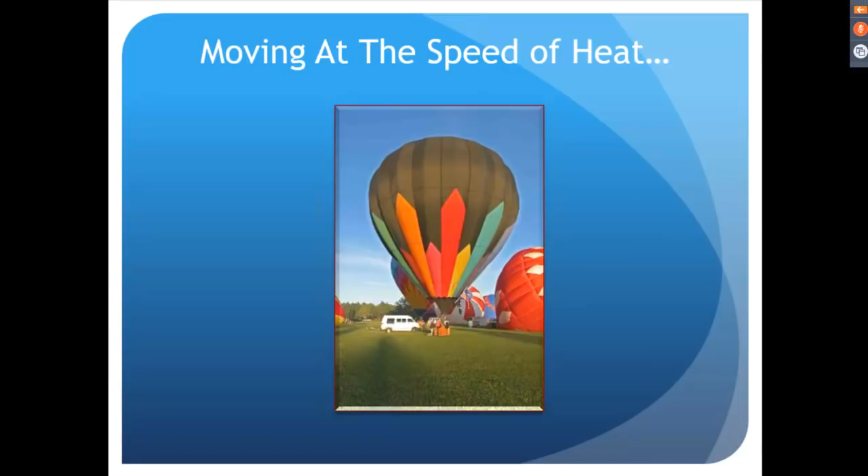To go out and fly, even just fly a balloon just for fun right now by myself would be not wise. So just because you have a rating doesn't really mean a lot to me. You can do this stuff without the ratings and be just as competent, in my opinion, as someone that has all the different ratings in order to do this.

Back when I started, if you'd have told me then that this is what I'd be flying now, that's a hard concept to get your mind wrapped around. One, because it takes so long to get there.

While you're in that tunnel, we have a joke out at the hangar where the airplane is now, that the light at the end of the tunnel, yeah, that's the freight train coming at you. So it's hard sometimes to see the light at the end of the tunnel, especially when you keep building and building and building, and you can't seem to make progress.

Sometimes you can work on the airplane for 5, 6, 7 hours, step back, and you can't see anything that you've done. It's like, what did I do? I've been here all day. So that was a constant thing throughout this entire project.

And you're going to have problems when you undertake something this complex. Just accept it. Don't get upset about them. Just figure out how to overcome the problem.

Well, back to, I wanted to build a Long-EZ. So we're back to there when this whole thing started. And I'm not very smart. I admit that, but I'm smart enough to know I'm not very smart. That makes a little bit of a difference.

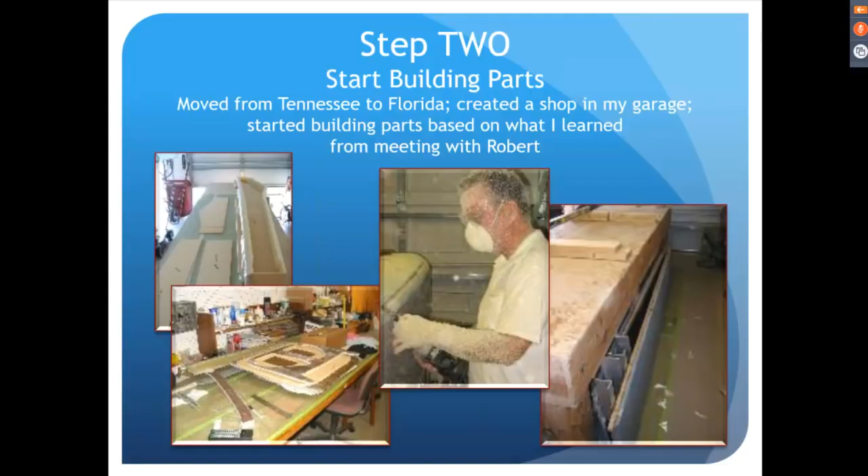Two years go by, I call Robert again. Hey, I've got these parts. I had the wings built, the canard built, center section spars built, the fuselage—in a tub stage, which means just the sides and the bottom, the bulkheads are in it.

Robert was a little bit impressed, or surprised is more the word, with how fast I was building these components, because a lot of people will talk about building the airplane or doing this and that, and they don't do it. Well, he saw that I was actually following through with it.

So he suggested making the fuselage wider for a real person. Bert's a tall guy, but he's not that big. So make it for a real person, make it wider—make it 4 inches wider, right down the middle. And then make it longer so a real person can sit in the back seat.

If you sat in the back seat of a Long-EZ, it's a little cramped. I'm only 5'9" and I'm kind of cramped in the back seat. My wife is taller than 5'9", and she would be really cramped sitting back there. So, okay, yeah—make it longer, make it 6 inches longer.

Change the front seat back so it's not as reclined—it's actually more comfortable. So we moved it 1.5 inches forward at the top compared to a stock Long-EZ. Didn't move the bottom forward, because if you do that it makes it too short and the rudder pedals get cramped. So just the top of the front seat is moved forward 1.5 inches, and then make the fuselage stronger.

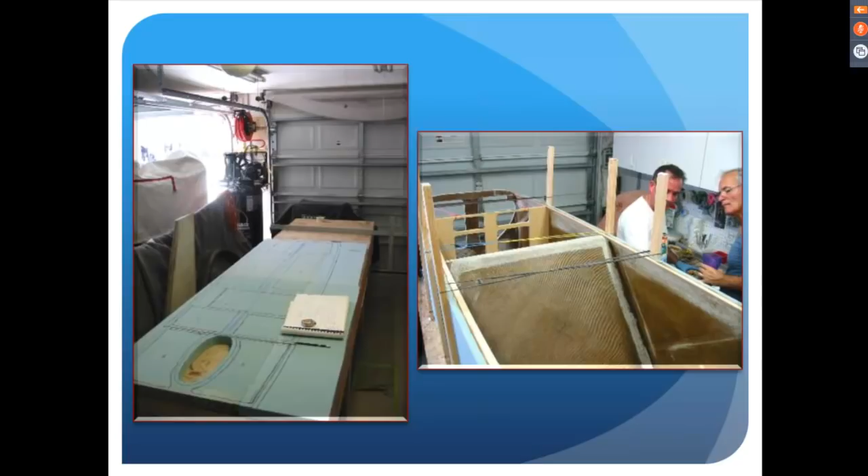This is where the fuselage is actually sitting upside down. The wood is also in a different position for the top longerons, which gives you more shoulder room. So besides the fuselage being 4 inches wider, we moved where the top longerons were to incorporate them into the sides of the foam, and that gives you another 1.5 inches at the shoulders. Makes a big difference.

Top left picture is the fuselage upside down. One of the changes we had to make because of the bigger engine and prop clearance is I wanted it to sit taller, and also a little higher, sitting on all 3 gear. You always see Long-EZs with the nose down - that's to keep the thing on the ground with nobody in it.

A stock Long-EZ only has about 3 pounds of pressure on the nose gear when it's fully extended. That's why guys always retract the nose and put it down so it won't flip over on its back. Well, we moved the gear 1 inch aft, and that changes the center of gravity when it's on the ground. Consequently, I could leave it sitting up on all 3 gear and it won't flip over.

Also, I wanted it to sit a little bit taller, so that's why the extrusions are also bigger - because I made it sit taller. The bottom right picture shows what a real tub stage is: the gear's mounted into the fuselage, wings are on it, center section's permanently mounted, and the canard's just sitting on it. That's what it looks like sitting in a driveway, and yeah, you get some strange looks from the neighbors when they drive by.

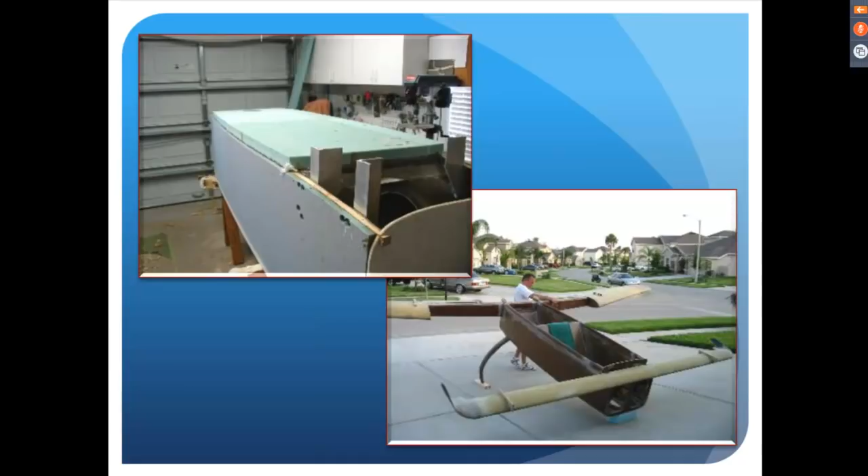Then Robert drops the big bomb. In the middle of all this, once he sees I can actually do all this building, he says, why not put a jet engine on it? I go, wait, what? So Robert had already built the Cozy Jet and flown it and proven the engine.

The engine itself is a GE T58, General Electric, originally designed back in, I think, the 60s as a pure jet engine. But the contract fell through, so GE ended up putting a PTU section on the back of it - that's the right side of the picture. The very right side is what's called a power takeoff unit, a PTU unit. That's where the transmission is, and it goes for a helicopter, for the drive shafts and that kind of stuff.

Obviously, we don't need that, so we actually take the PTU section off. Taking that PTU section off, you also have to modify the back of the engine, and I have some pictures further in that I can show you some of those modifications. So we actually take it from a gas producer back to its original intent as a pure jet engine.

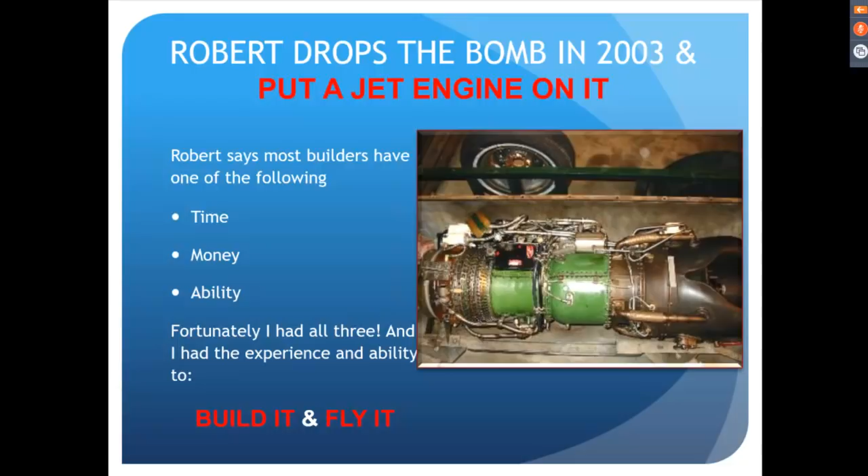It was on eBay for $12,000. I called the guy, offered him $10,000 to take it off eBay and sell it to me. He did. What you see it sitting in here is the can that it was in. You can't really tell, but in the top left of the engine there's a yellow and green tag hanging off of it. Most of the components on this engine were zero time - they had been removed and replaced by the Navy. So this is a zero time engine by the Navy. I got very fortunate getting a zero time jet engine - by the time I had shipping, I had $11,000 in the engine. Those engines now run anywhere from $38,000 to $40,000 for the same engine. I just got really, really lucky to get this engine at that price. I've not found any at that price, at that condition, anywhere close since.

Some of the changes that you make - these are just some of the changes that happen. Now, a rule in building an airplane: you change one thing, you're going to change 6 others. I'd say that's a bit conservative. The engine mount attachment points are the same place you'd find on a Long-EZ, but the attachments are a lot stronger.

It has to have an intake plenum system in order to feed the engine. Now, I'll tell you anything about this airplane you want to know - there are no secrets in building this airplane except one, and I'll tell you the reason: the intake system, the plenum system. I'll tell you about the intakes, but I won't tell you about the plenum. I'll show you pictures of it - you can see it when I pull the cowling off, did it at Oshkosh. But to explain it, there are internal sections to it that you can't see. That plenum is critical to the engine running.

It's a turbine engine, right? It's got a big fan at the front of the turbine. Air has to hit that fan at the exact correct angle in order to feed that engine. If you make the intakes too small, you're going to starve the engine - you never get the power you need. You make them too big, you can end up with tunnel rumble - the air rumbles in there, it actually builds up an air dam in front of the intakes, and it'll actually slow you down. So that is really the only secret.

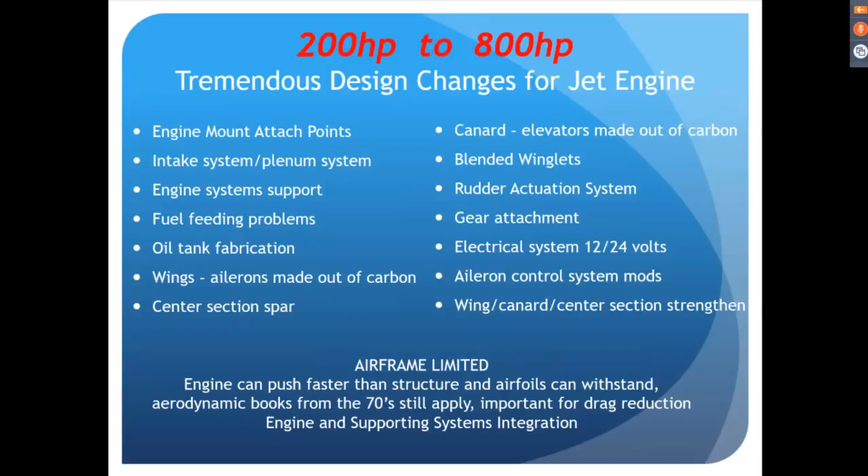So you actually have to pull the nose up, and as you get higher, your climb rate actually increases. Now that's not particular to this airplane - I fly an Airbus for a living, and the same thing happens in the Airbus. It's a dog above 25 to about 32,000. Hit 32,000, it's reached its max true airspeed, and all of a sudden the climb rate increases. That's pretty standard with this kind of airplane.

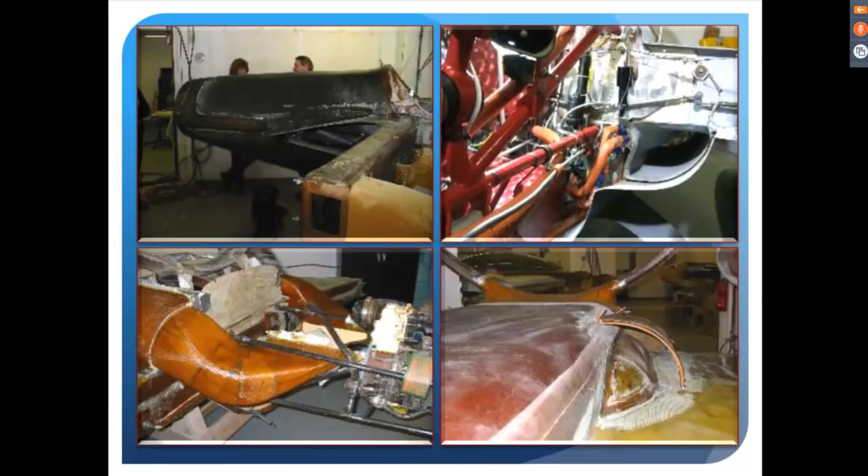Like I said, we took the PTU section off of it. You'll see a picture of that in a bit. The cowling, top left picture, is all carbon fiber. It's about 5 feet long and goes all the way around the engine. It's very, very light, bulky, but one person can pick it up and walk away with it. It's not heavy at all, probably doesn't weigh 15 pounds the whole thing, all set up, clear, painted, primed, everything. It's carbon fiber, so it's pretty light.

The top right picture, on the right side about the middle, that's the back of the right intake. That's what the plenum attaches to. It goes from there up through the center of the picture, through that V opening to the engine. That curve is critical, which is why in the plenums, bottom left picture, you can see the same fuselage upside down, and that's the same curve it's going through to get to the intake.

Now in this picture, the plenum in the bottom left picture is not complete. The center part of it is not done. And to be honest, that's where most of the voodoo in the thing occurs.

The bottom right picture is a front-on shot of one of the intakes. Interesting thing about the intake: you have a formula, and Robert knew the formula off the top of his head, but we confirmed it in a couple aerodynamic books. That intake has to be of the correct size. If it's too big, you get tunnel rumble. Too small, the engine won't work right, it can't suck enough air, and you lose power. So 4 of us sat at the table with that formula and figured out how big those intakes need to be in square inches for each side.

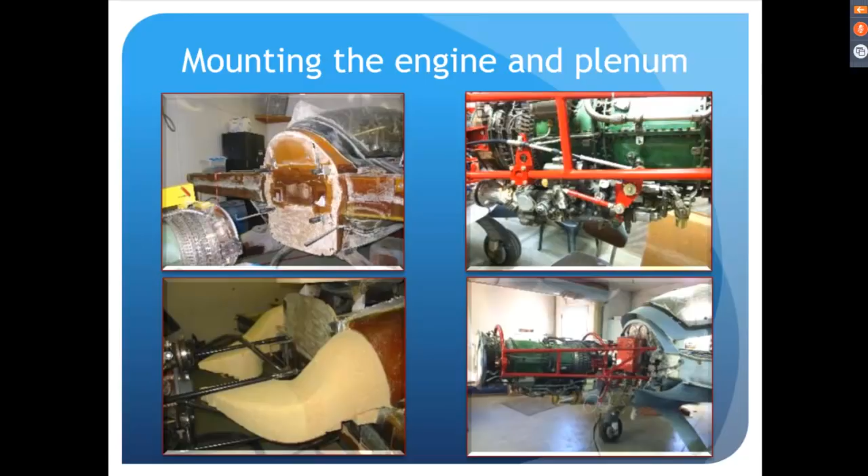The voodoo I was talking about on the left picture, where I'm pointing, that's actually a cone inside the tailpipe. Now, on the top right picture is the tailpipe, okay? $7,000 for that piece of metal. It's Hastelloy is what it's made out of.

What's critical is if you look past my finger, on the left picture, you see what looks like blades in there. Those are actually fixed. It's called a stator, a fixed blade. See how it's got a cutout in it? That's how you take it from a gas producer back to a straight jet engine.

That's one thing. And the second thing is it has to have that tail cone. If you look past my finger also, you see it looks like vanes sticking out from that cone. There's 5 of them, okay? Those are critical also to hold that cone in place.

Between the cone, the diameter of that pipe, and the length of the pipe will determine your exhaust gas temperature, which also is going to determine how much fuel you can put in the engine. So it's EGT, exhaust gas temperature, that's what you limit a jet engine with. With this kind of jet engine, this is a turbojet, a straight tube like a Lear 23, same thing. On the bottom right picture, if you look at the left side, you can see those stators where the cutouts are. That's with the tailpipe off of it.

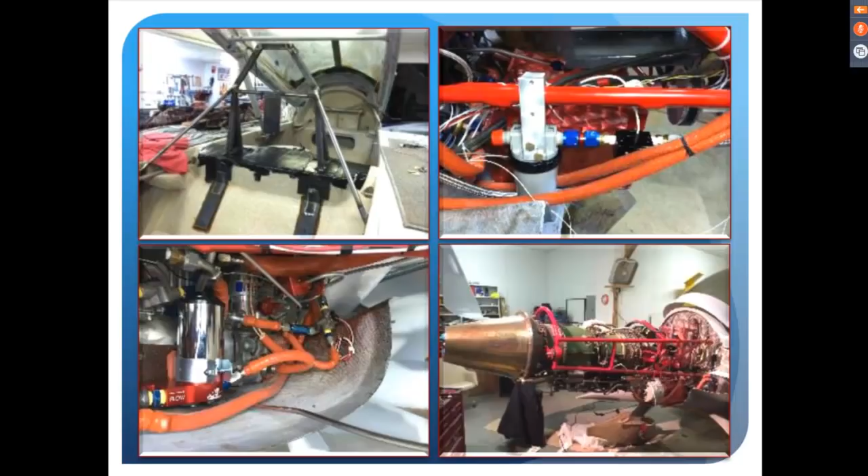So anyway, top left picture, I've been upside down in an airplane off the runway. Robert's been upside down. So getting upside down is kind of an important thing with you. Mike Melvill, one of Rutan's test pilots, wasn't happy with the, quote, rollover structure of a Long-EZ, and changed the rollover structure to make it a true rollover. It wasn't really a rollover structure in a Long-EZ, it's a headrest. It didn't have any real strength to it to support an airplane if it got upside down. So here, a lot of the black stuff you see on the top left picture, that's duct tape.

It's just to protect the surface, but I built a true rollover structure and reinforced the seat back. This was an afterthought, by the way. I didn't build it with this in mind originally. It's something I decided on because my head's softer than it used to be, so I wanted more protection. We integrated and welded up that rollover structure. Now it looks like that, but I built a cover to go over everything so you don't see all that ugly metal hanging out. Also, fiberglass is easier on your head and hands if you hit it, versus the metal.

It is a true integrated rollover structure, probably overbuilt, as is the story with most of this airplane. I overbuilt it because I'm not a structural engineer. I did not go to college. I'm all self-taught, so a lot of this is best guess, and I erred on the side of what's really, really good. Once again, surround yourself with people a lot smarter than you, and listen to what they have to say. Everybody I talk to will give you their advice and tell you what they think. The problem is, are you going to listen to the people you really respect with that information?

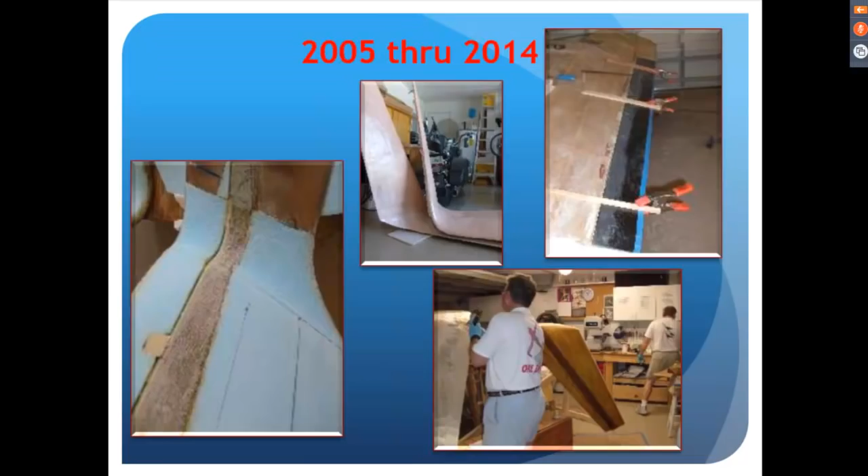Back on those winglets I was telling you about, blended winglets - the picture on the far left, that's looking down the winglet at the wing. I know it's kind of hard to grasp what I'm doing there. It's a weird looking picture, but the foam is the actual winglet.

What we did is, like I said, we had to incorporate the wing to the winglet. How do we do that? We extended the spar of the wing full length of the winglet. It's a C-section spar, shaped like a C, so we scarfed it onto the wing joint and took it all the way up to the tip. Now, Long-EZs, VariEzes, Defiants, all of them have spar cap material. We extended that also from the wing to the winglet.

The math we did says that we can do about 170, 190 knots at a 90-degree angle, and that winglet will stay there. I wouldn't want to try it, but it's nice to know that it'll stay there. And yes, all the way up to max speed, I've had it - they just sit there, they don't care.

The center picture shows you what the blended winglet looks like in micro - that's both winglets, one wing sitting on top of the other. The wing on the right is the right wing, and you're looking at the back of the other winglet.

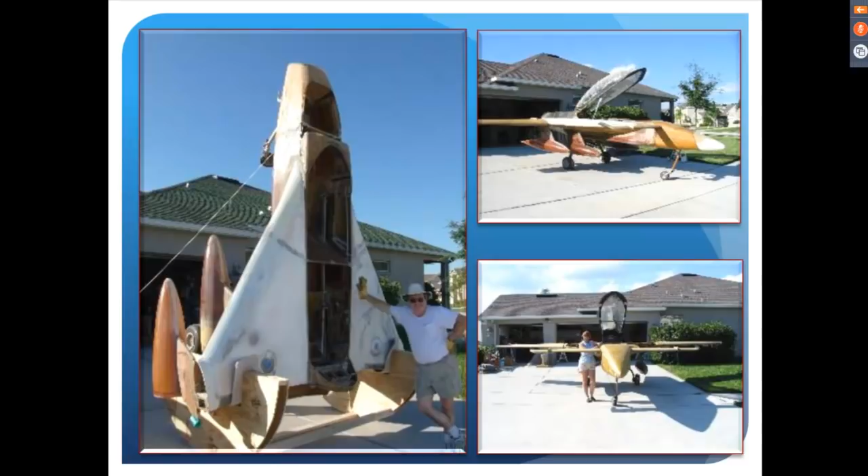Top right picture, I was putting that canopy on, and guys were pulling up. One of the funniest stories is guys pulling up in front of it asking what is it, is that a jet? One guy in a Cadillac Escalade with 7 people, the front right window comes down, the guy yells out, 'Is that a jet?' And Robert goes, 'Yep, sure is. It's okay though, Lance's wife there used to be a Playboy bunny on their DC-9. Still has the rabbit tail.' That story got around the neighborhood. It really did. True story.

In building the airplane, if you're 90% done, you have 90% to go. You have a lot of accomplishment sitting in front of you, but there's still a lot to do. It seems like it's never ending, and this is where you don't stop. Keep putting one foot in front of the other. Just keep going. Pick a job for the day and finish that job. Don't go off on a tangent.

Just keep going - this comes into play when you're doing the finish work. Sanding, it's a fiberglass airplane, moldless composite construction, all of Rutan's airplanes. That means there's a lot of fill and sand, fill and sand, fill and sand. Then you end up having to paint it. It's gray, but that's not paint you see on the airplane - when you see pictures of it, that's primer, K36 primer. K36 is tintable.

That's an experiment - I wanted to get the winglets painted so it looks like it has an American flag over it. I got quotes to do that, anywhere from $18,000 to $23,000. I'm going, this can't be rocket science. That's how I got sidetracked into the painting of the airplane. Took airbrush lessons - you could take airbrush lessons, I did not know that. It's a week course, they have them out in Vegas and in Orlando, and you learn how to airbrush. That got me into mixing paints - well, can I mix primer? So that's why I ended up with different color primer on the jet. It's actually K36, me experimenting with tinting stuff. That's how I ended up with different colors. It wasn't a pre-thought out thing, like I wanted to do a gray camo - no, that was an accident.

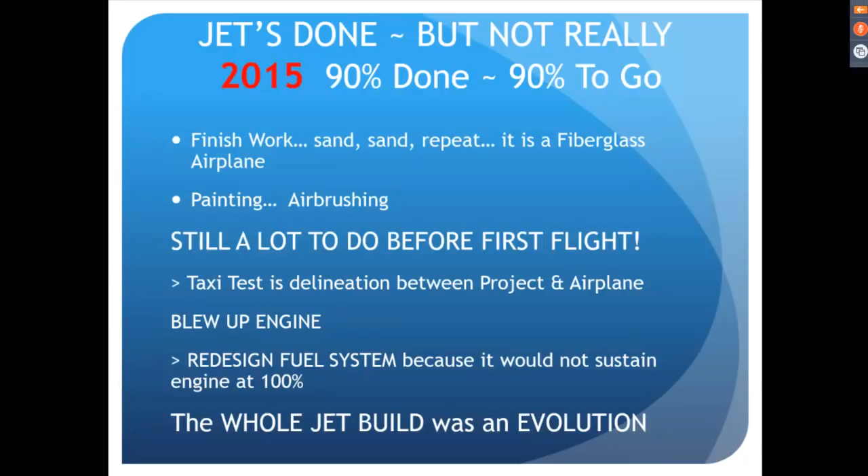That's when I blew up the engine. Remember I said we modified the engine, took the PTU section off. I'll show you a picture later of why that happened. Just because you think you have a good idea doesn't mean it's a good idea. Remember, building any custom built airplane is an evolution. You have to be open to change.

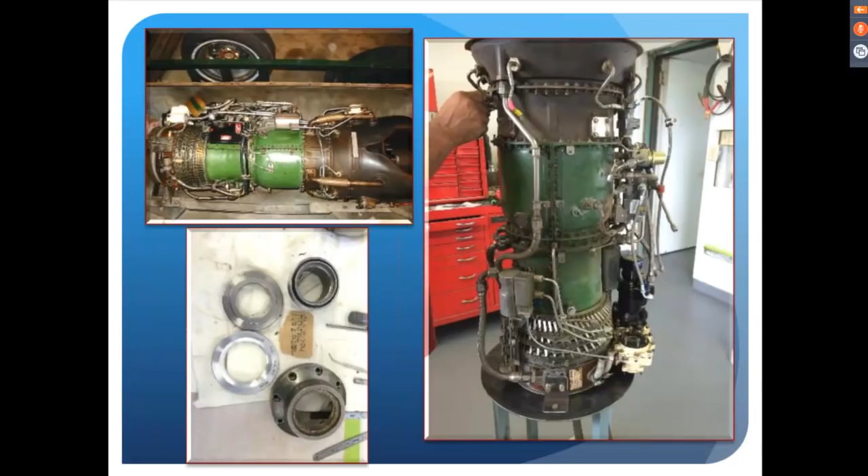Okay, blew up the engine. In the top left picture, see those big tubes going from the PTU section forward? Those are actually tubes off of bleed air that cool the PTU section. Okay, great.

Well, we took the PTU section off, right? Don't need it, so I don't need those tubes, right? Nope. So we plugged those holes. Look at the picture on the top right, or on the right side. See that nice bright silver square about 3/4 of the way up to the right of that guy's hand? That's Mike's hand. There's one right next to his hand, and there's one further around to the right. That's where those tubes used to be.

What we learned later is this engine is incredibly balanced inside with airflow. By plugging those tubes, I unbalanced the airflow inside the engine, and that allowed or forced air over the number 2 bearing. That air blowing over the number 2 bearing deflected the oil stream. In the bottom left picture is what's left of the seals that were around the number 2 bearing when the number 2 bearing seized.

I was on the ground doing taxi tests, caused a compressor stall, tires squealing, people screaming. It was real horrible. It's just incredible, bang, sound, screech, and it doesn't sound good. So the forensics, we figured out that's what had happened.

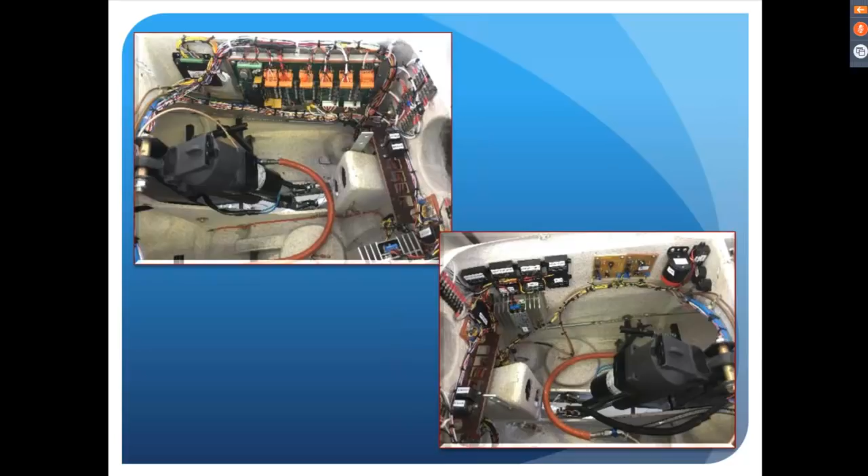That only took a year to do all that, to tear it down, because to tear it down takes some rather extensive, very custom parts. So it's not a simple, easy process by any stretch of the imagination.

The top left picture is a part of the electrical system. That's what's known as a power board. Blue Mountain Avionics, Greg Richter built that just for this jet. Everything in the airplane goes through that power board, so it's one point connect, so to speak.

All right, didn't quite work that way, because the power board needs to be either 12 or 24 volts, and since half the systems are 12 and the other 24, we couldn't get the batteries to charge right. So we ended up taking the entire airplane to 24 volts, and then the bottom right picture is where the stuff that needed to be 12 volts, I tapped off of it through transformers to 12 volts to make everything happen.

The big black thing in the bottom right picture, that's the hydraulic nose lift. There's normally a cover over that, you can't see it, seals up the air. And the hole you see on the bottom right picture on the left side, or on the top left picture on the right side, that's where my fire extinguisher goes.

Remember I said I had a problem with the weight and balance? Ended up having to put 4 batteries in the nose, 4 12-volt batteries. I wanted the fire extinguisher anyway, so it's kind of cool, an 18-pound fire extinguisher up front. Those lines go all the way back to the engine. I needed that weight to get the weight and balance where it needed to be, which is cool because that gave me functional weight instead of just putting lead in the nose.

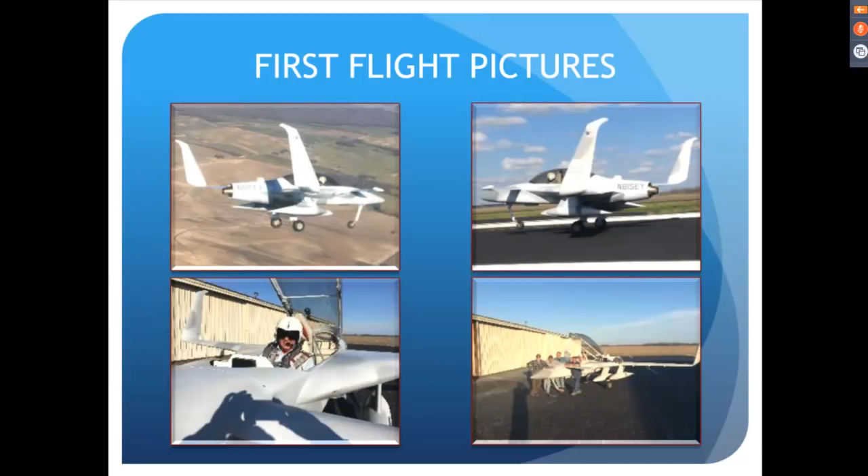The bottom left, the reason I'm smiling isn't because of the first flight. I was smiling because of the animated way Richard came running up to make that picture. It just, to see that kind of professional individual do what he was doing was quite amazing.

The airplane has been, from day one, about education. I like to learn. Unfortunately for me, I learned a lot more than I ever wanted to, especially about jet engines, how they work, how to rebuild them, composite structure, how to figure stuff out for load bearing, the aerodynamics.

I used books from the 60s and 70s. You know, air molecules haven't changed what they do since then, so that's where a lot of the aerodynamics came from. It still works. The math I've had to learn because of the volume computations, the painting techniques, like I already said about the airbrushing, electrical system, I learned more about electrons than I ever wanted to know. The relationship with the FAA, yeah.

When you do something really different like this, you can run up against a lot of roadblocks.

It was difficult. You just have to keep plugging at it to get to where you want to go. The difficulties during construction, I cannot overemphasize. Just keep going. Don't stop. One foot in front of the other.

Took it to Oshkosh this year. It really was its first real public debuting. I've heard the stories, I've read the stories, you've read them too, about all the volunteers and how great they are and all that good stuff. Let me tell you, it's true.

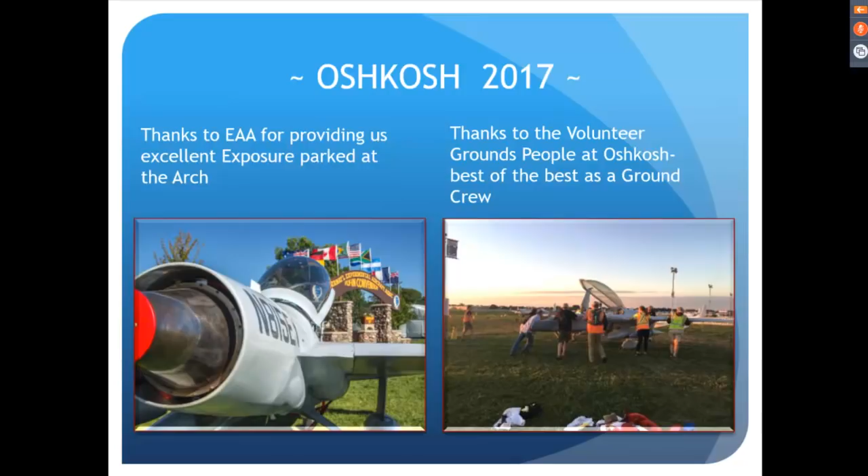You can go to jetguys.co. If you don't get your questions answered here, go there, leave the question, and one of us will get it answered. Without these guys, this airplane would not have happened. There's no doubt about it.

The whole time during the construction, it wasn't 'we can't do this' or 'we can't do that.' It was 'how do we do this, how do we do that' through the entire process. And I suggest you take the same attitude. Don't say I can't do this or I can't do that. Figure out how to make it happen. There's always a way.

Some resources: you can go to YouTube, look up Jet Guys, Facebook, same thing. There's all kinds of videos, like 50 videos on YouTube of this jet and John Albritton's. John's one has a twin tail, mine doesn't, so you can see what it looks like. There's videos with it taxiing with the cowling off so you can see it working without the cowling, with the cowling, in between. There's all kinds of different stuff out there for you to look at.